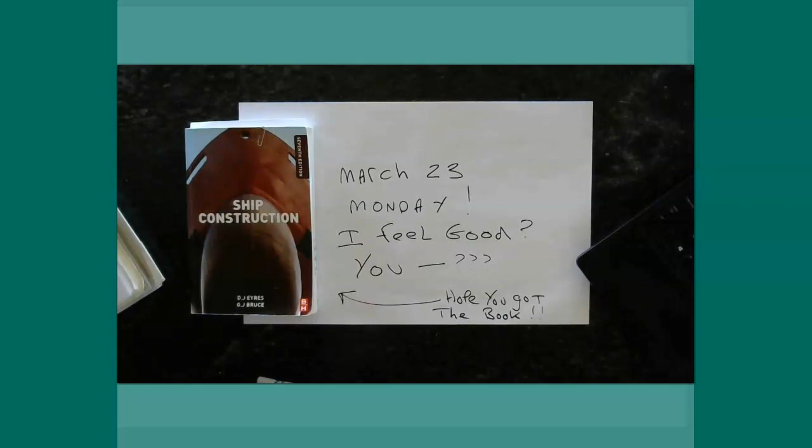Ship structure, Monday, March 23rd. Today we're talking about aft end structure. It's in the textbook. The first thing to understand when we start reading the chapter is that a lot of effort, time, and considerable attention is paid to the stern of the ship, and here's a key word: in order to improve the flow into and away from the propeller.

In the past we've talked about this indirectly. Remember that first day of class I put a dollar sign on the board? Everything in this business is about money. If we can improve the flow of water into and away from the propeller - how it feeds in and then feeds back out - we're really talking about efficiency. And if we can improve efficiency well, it's going to be really good for all of us.

There are two distinct types of sterns I want you to know about: one's called a cruiser stern, and one is called a transom stern. Transom sterns are like we've got on the State of Maine. Transom sterns are the modern choice for the following reasons: they have good hydrodynamic flow, they're less expensive to build, and there is greater deck area up above.

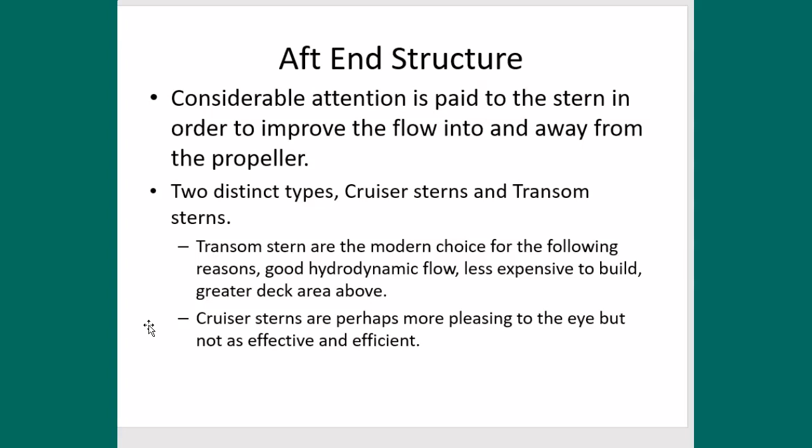So I'm going to be asking you on that next test about the two different types of sterns, and the answers are cruiser sterns and transom sterns. Here's a picture.

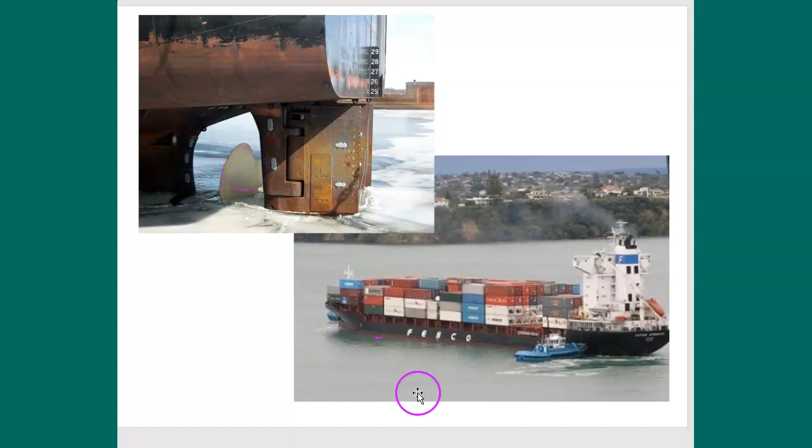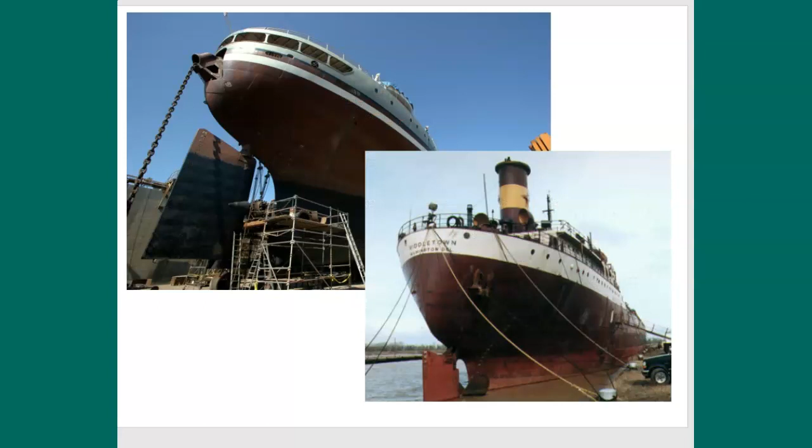This one, not so much. We can see that it's a little bit more submerged, but we do get a good look at this very different stern than what we looked at in the previous picture. So, cruiser stern and transom stern.

Remember, we're going to have double bottom drawings, bow fore-end structure drawings, and stern structure drawings. This is going to be pretty much the one. I'm going to be providing you with another sheet of paper, and we'll be working through that as a group, and you'll see how we do that.

Well, we're going to move off this diagram and come back to the camera sheet here. Let me just fill this in, and I'll give you the rough shape.

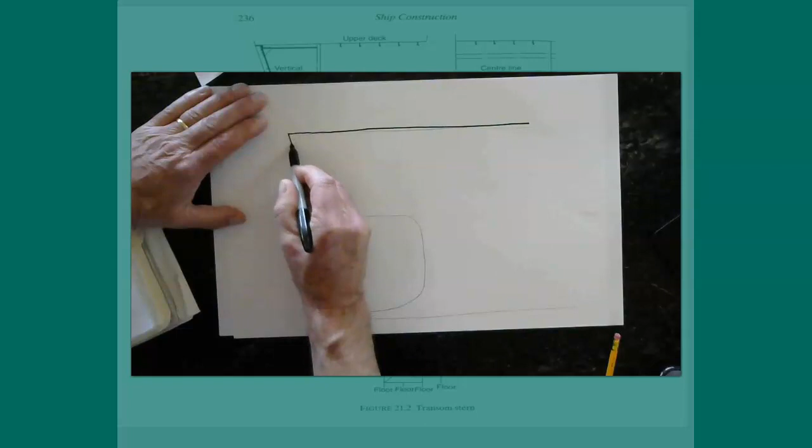This is going to be a transom stern diagram, and this direction, of course, is towards the bow. And let's label this transom stern. Okay, so we'll get her set up like that.

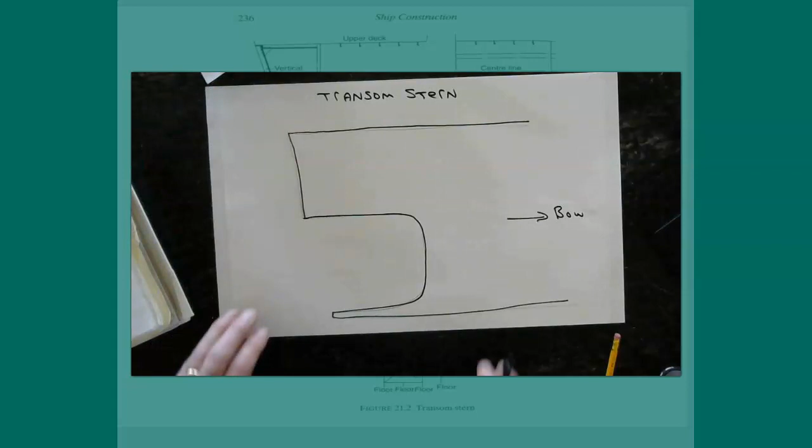As we go through this, let's make a list. I'll put this down here on my notes, in a little bit of color. I'm going to make my list over here of the type of stuff that we want to get into the drawing.

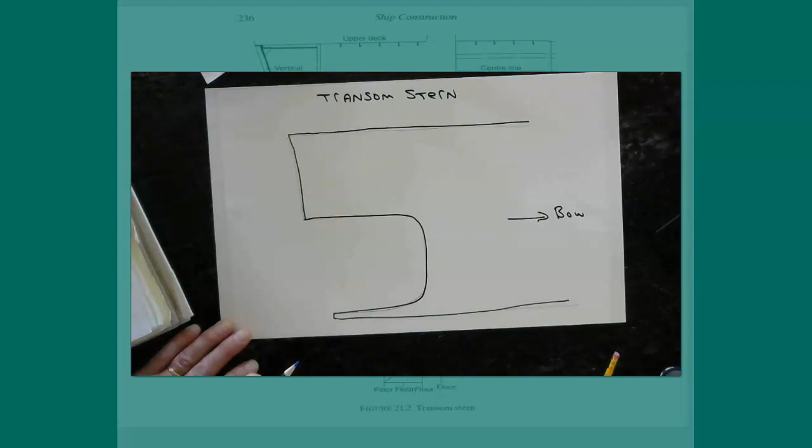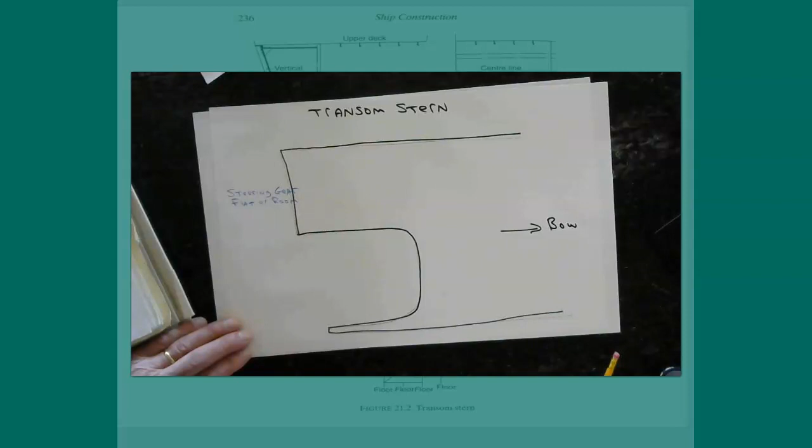So number one would be the steering gear flat. We could also call it the steering gear room, or the steering gear space—something like that. We want to have, I'll put a little bullet there, something called the rudder trunk. That's good, write that down. We're going to show the after peak tank.

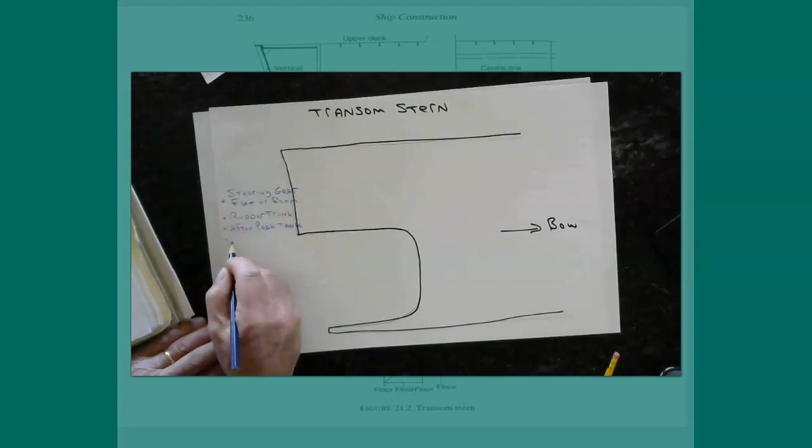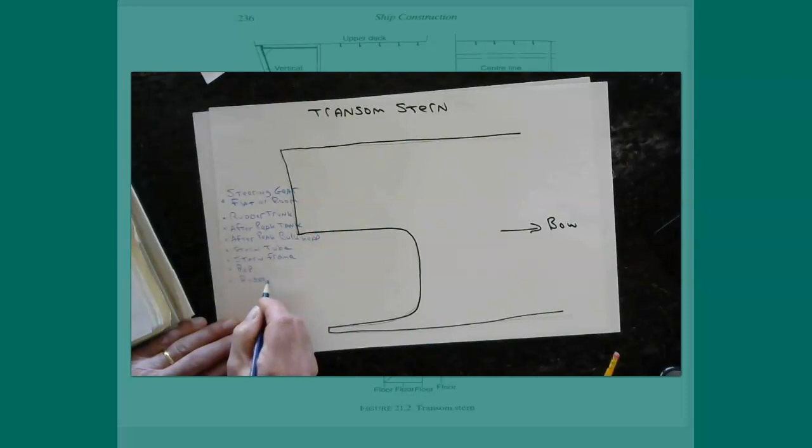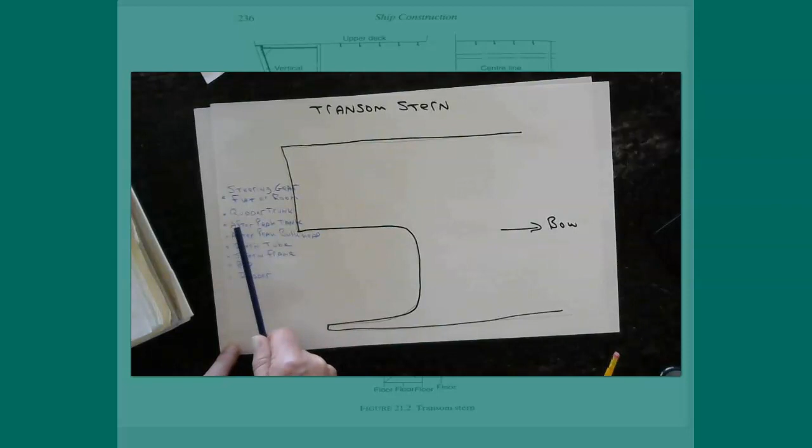It's also going to be the after peak bulkhead. Something called a stern tube. Stern frame. And of course, the propeller and the rudder will also be included back there. So: steering gear flat or steering gear room, the rudder trunk, the after peak tank, the after peak bulkhead, the stern tube, the stern frame, the propeller, and the rudder.

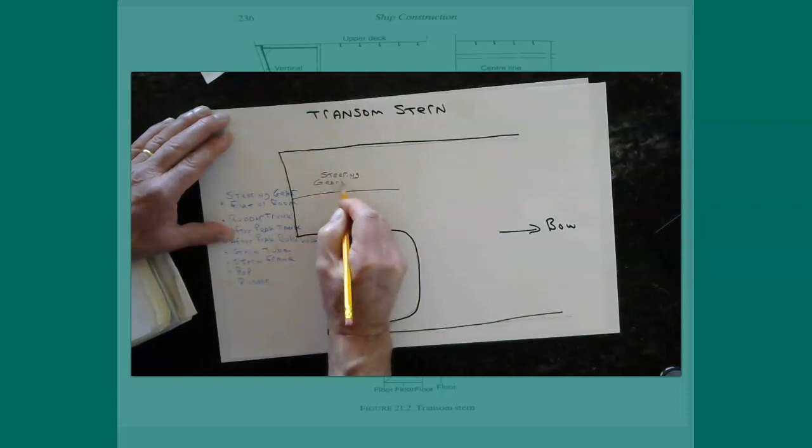So let's start. Let's divide this space something like this, and we're going to call this area here the steering gear flat, up in this location. You can imagine walking back there, and through that door, there might be a room here where all the steering gear material was—you're familiar with that from the training ship.

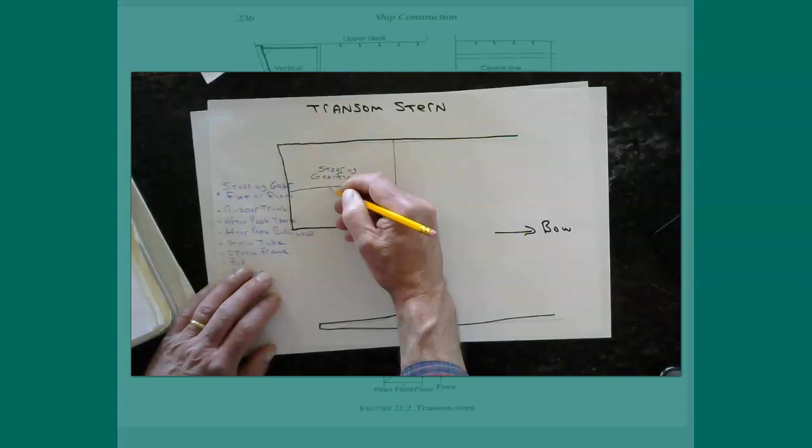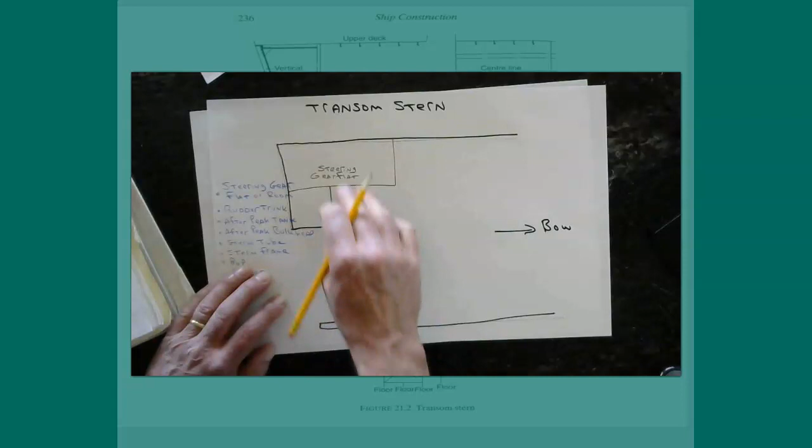Now, this space underneath, we need to show this somehow because there has to be something called a rudder trunk. The rudder trunk is a space that connects the outside down here into the machinery. Let's just show a little bit of machinery, some pistons and rams, all this stuff so that we can turn the rudder.

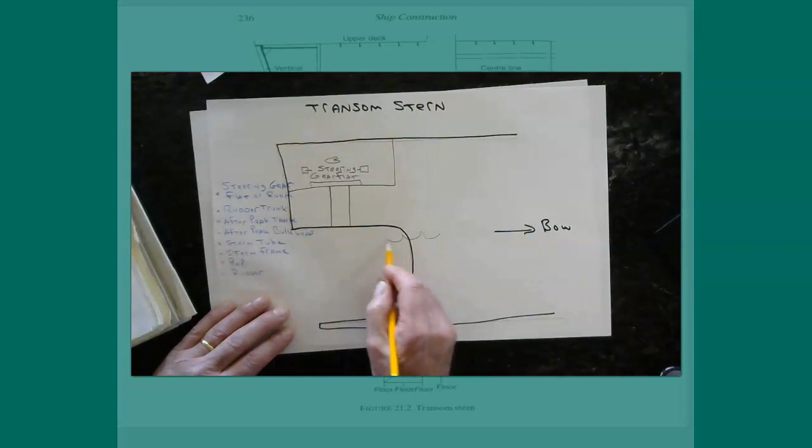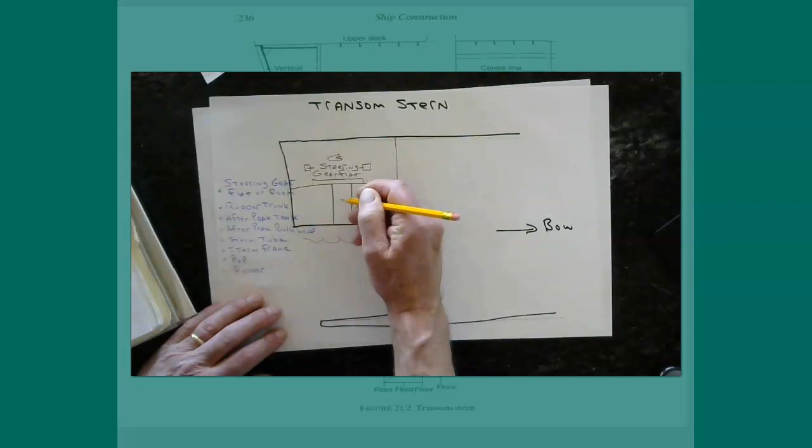But the rudder trunk is not a void space. It's a space that connects from—let's put water right here—connects to the water level. And that water level could be up here, it could be down here, as the waves come. Think of the escape trunk down in the engine room that comes all the way up to the main deck—the escape trunk. So you know what a trunk looks like.

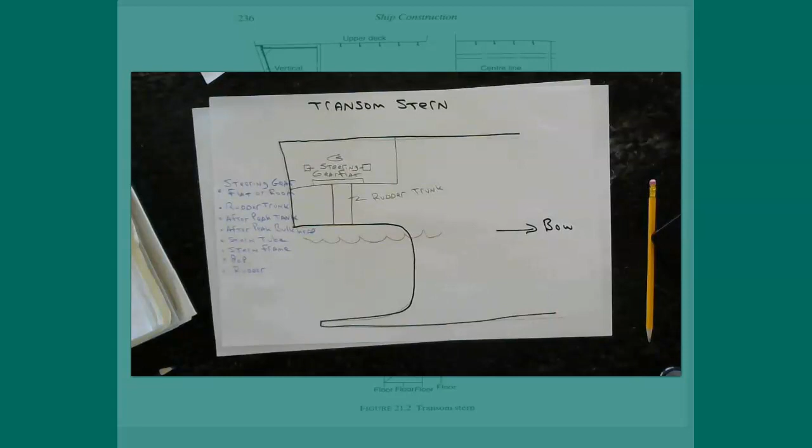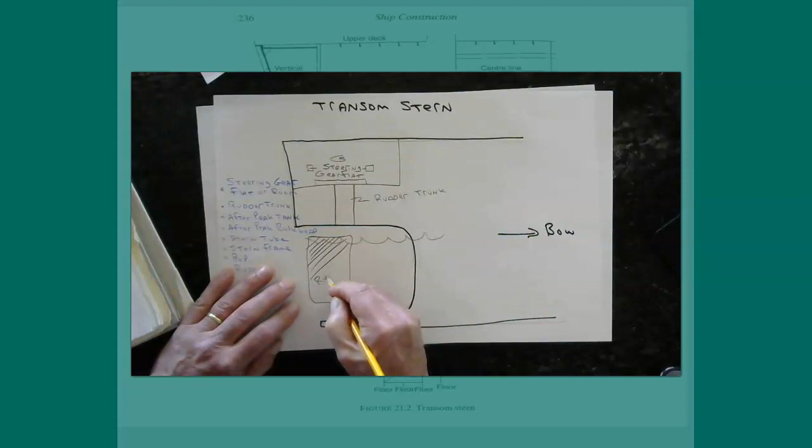It's usually a sort of vertical shaft, and you can imagine that the rudder is down here. I'm going to show the rudder, and I'll put the rudder in. We will do this drawing a number of times, I assure you. I'm just going to put this down as the rudder in this way, and the rudder post comes off the rudder, goes up through the rudder trunk, and into the steering gear flat.

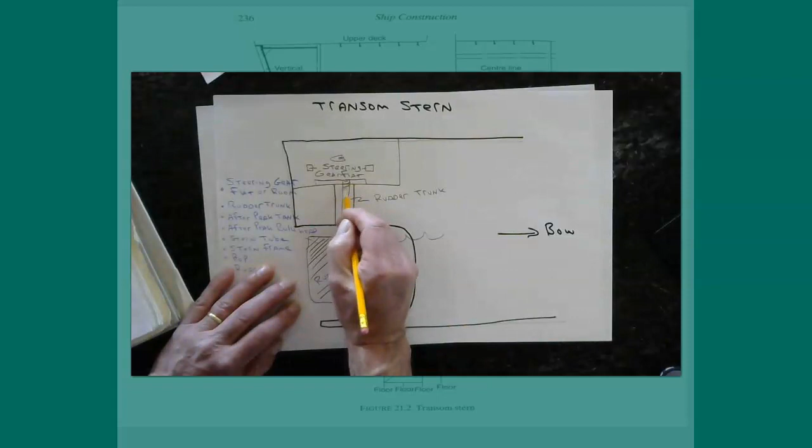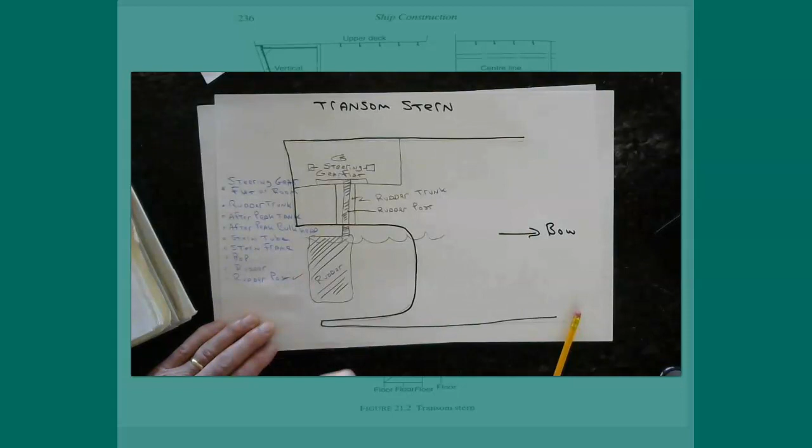So this is the rudder trunk, and this is the rudder post. Now, did I put the rudder post on this list? No, I didn't, so we have to add the rudder and the rudder post. Okay, let's see. We had a lot of stuff here, so we'll start checking this stuff off. I got the rudder post, I got the rudder trunk, I got the steering gear flat, so check, check, check.

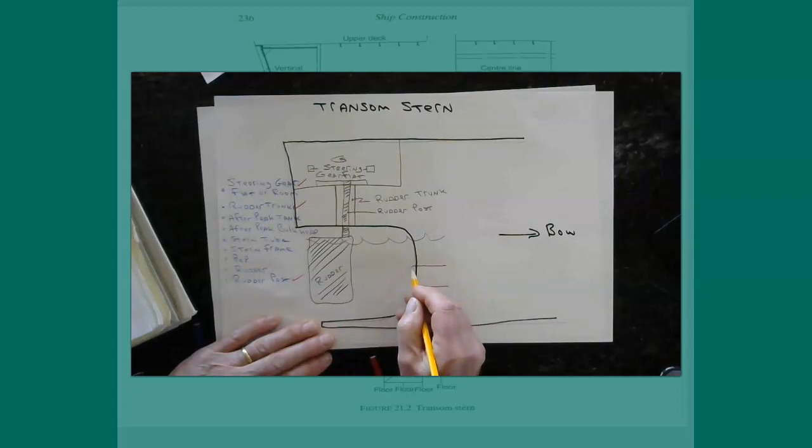Let's see, we got something called a stern tube. Now the stern tube goes right here, and we'll draw it sort of. Again, it's the area where the shaft comes through, so it is round like this. It extends from just outside the ship to here, and we'll label it stern. It would help if I spelled that correctly.

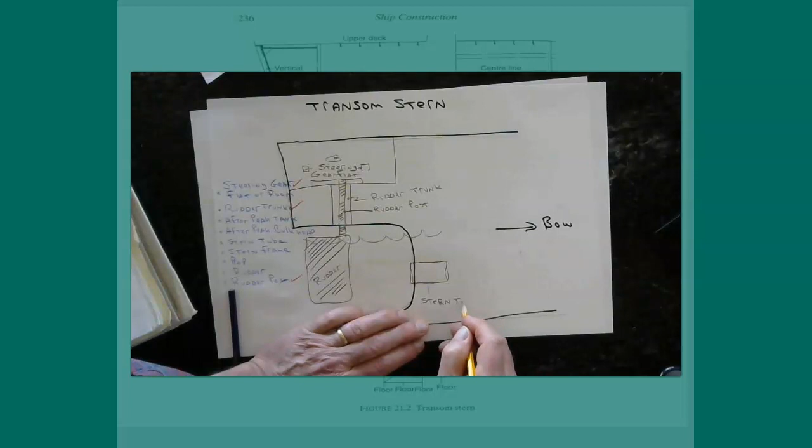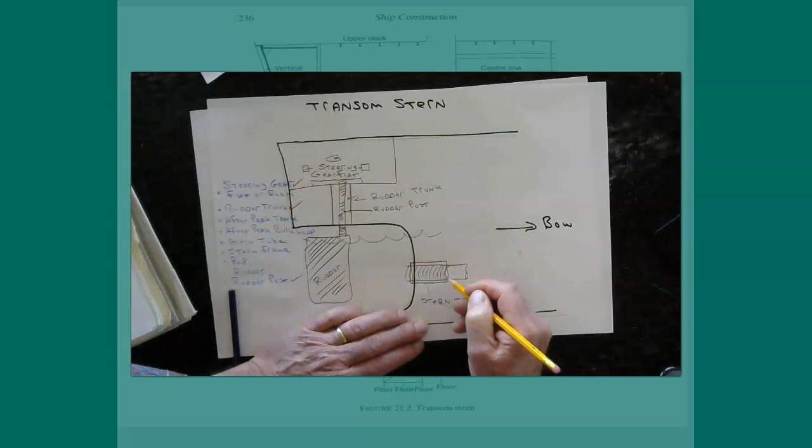And the shaft comes through the stern tube. Have you all learned how to draw something so that, see that little way I just put that on there? That, in mechanical drawing, is a way to show round. It kind of gives it a little bit of dimension. So here's the stern tube.

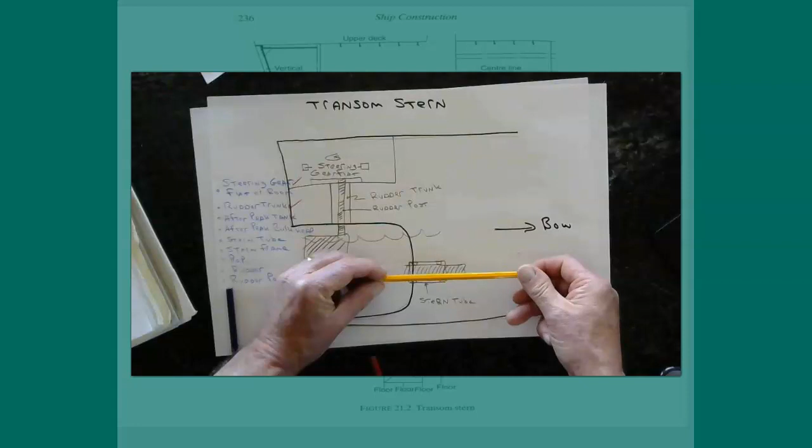And the stern tube supports the shaft. It has bearings in it. But the stern tube has to be such a way that it allows, see the shaft turning? And we can do that with this. We'll use this bigger pen. So the shaft has to be in here so that it can turn. The propeller shaft has to be able to turn.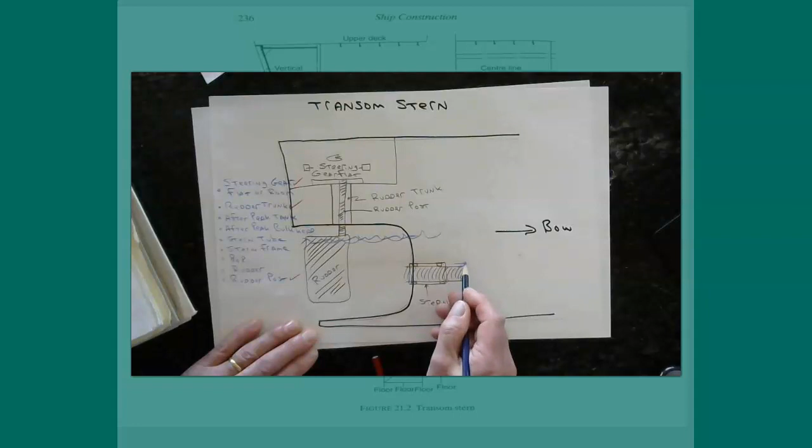The other thing it has to do is keep the water out. There is water here, and it wants to come into the engine room. So we need to stop that, so it needs to be a watertight seal, and we'll talk about different ways that that's done. It has to be able to keep the water from outside the ship from coming into the shaft alley, and it needs to allow the shaft to be able to rotate.

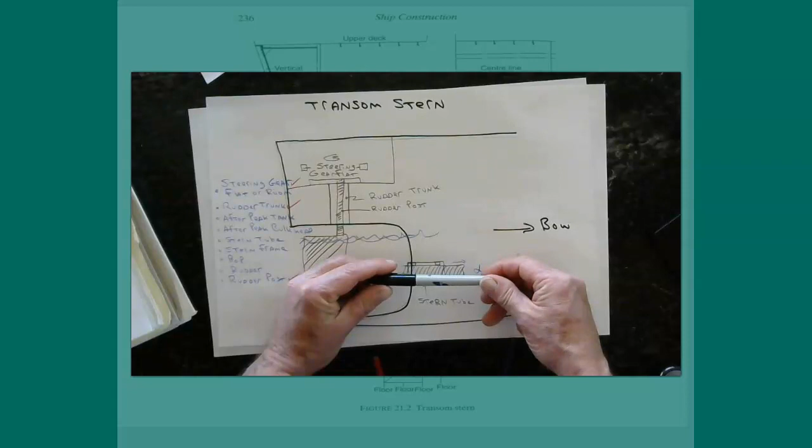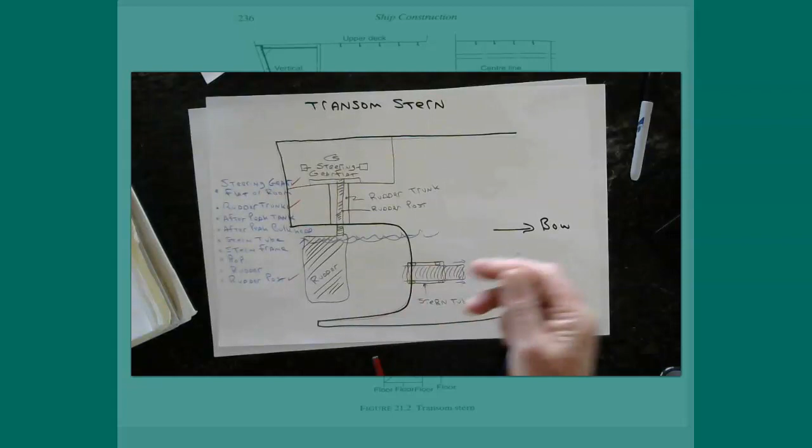That's a pretty complex and pretty important piece of equipment. You have stern tubes on big ships, and you have them on small boats. If we were there in the classroom, I'd show you a picture, I'd show you a little bronze stern tube that's sitting up on that shelf where I keep all the models in the classroom. I'd drag it over and you'd look at it and you'd see how it allows the shaft to turn.

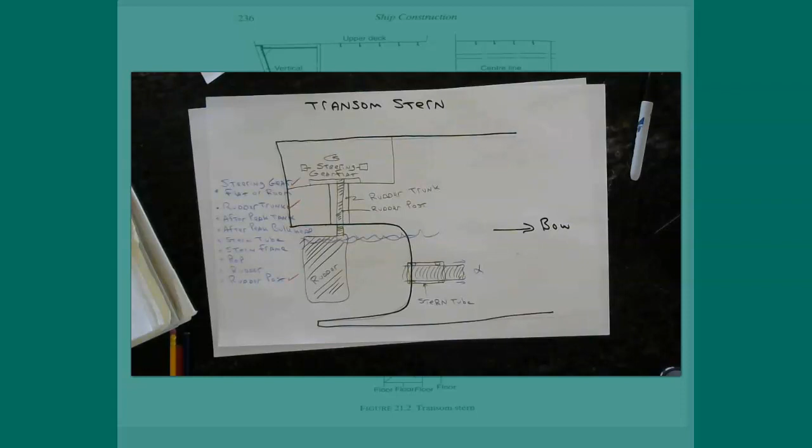And I think it came off one of our double-ended boats on the waterfront. A number of years ago, we built those and we changed out the stern tubes. Just a little example, maybe I can find some more pictures of it. And then, any vessel, whether we're talking about the state of Maine, or a little launch or a sailboat on the waterfront, every one that's got a shaft coming out of it and a propeller has to have some type of stern tube for the shaft to go through. So that's a long discussion.

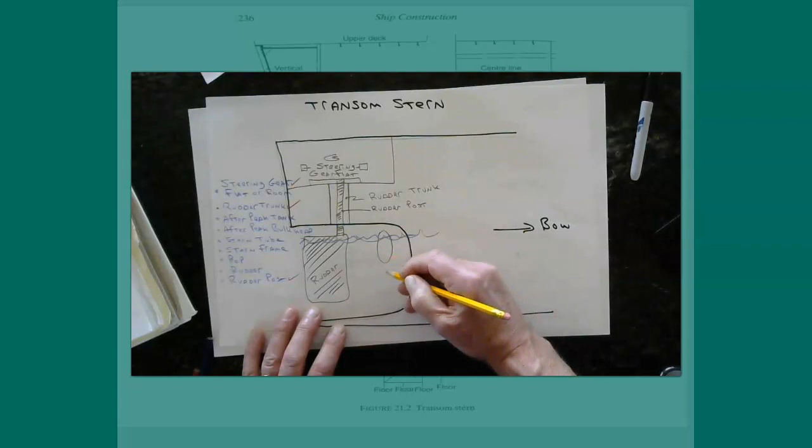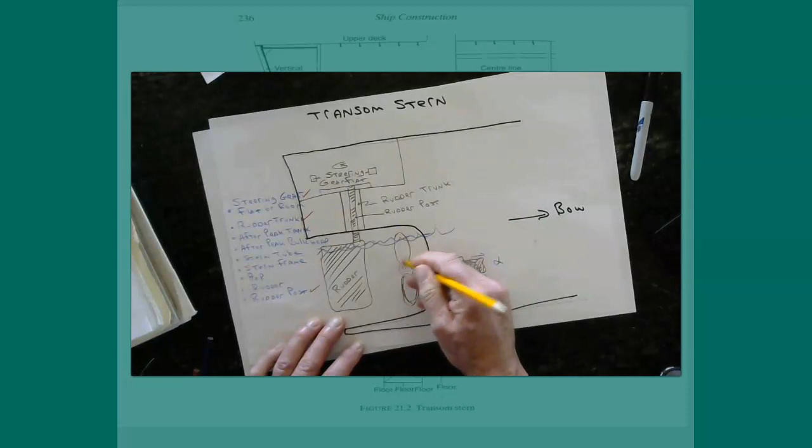Now, of course, we have to have this area here for the propeller, and I'll draw the propeller here with a couple of blades like this, and it connects to the shaft. Kind of get that a little bit more balanced. Now, I didn't do that very well. Let's clean this diagram up here a little bit.

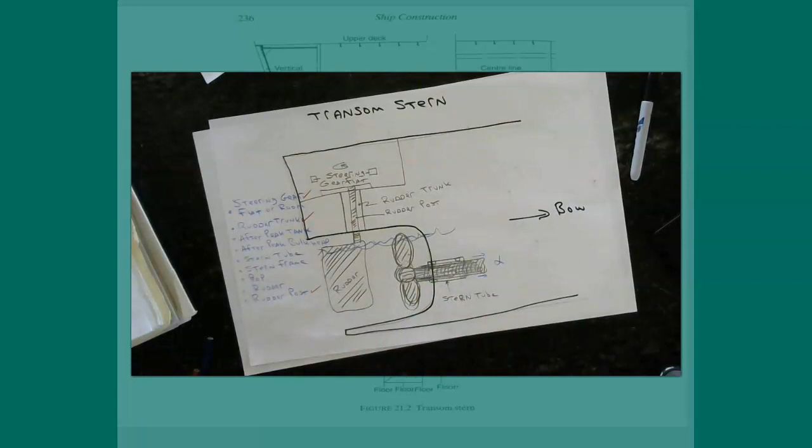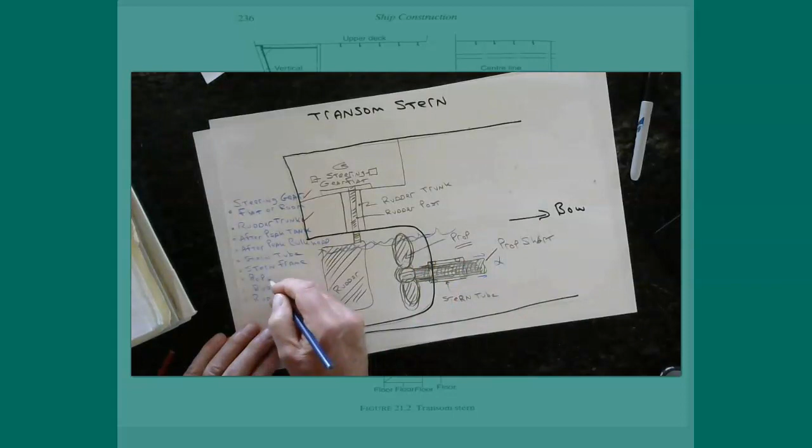What do we have now? We've got the stern tube, and we've got the propeller shaft. We've got the prop itself. We've got the rudder. Let's go to our list. We got the prop, we got the stern tube, we got the rudder, and let's see what else have we added here. We got the prop shaft.

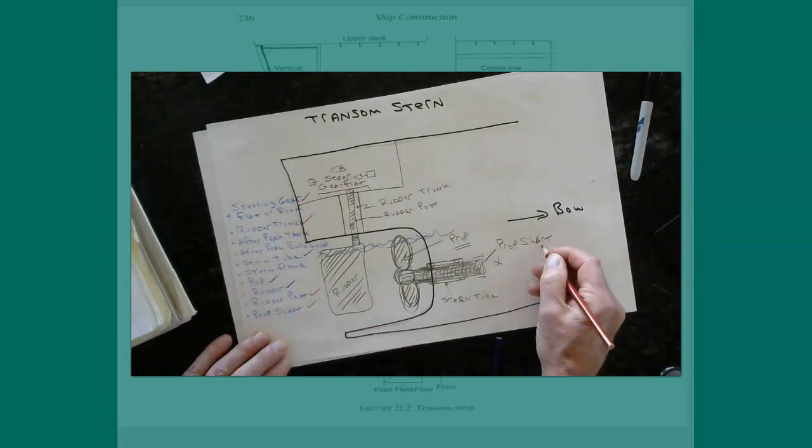I guess we can include that as well, so we'll give that a check mark. We got this, we got the rudder post. Yep, we got that. We got the rudder. Check, we got that. I'll use the right colors that I was using. Okay, so we've added a lot of stuff to this diagram. Let me get that set for you.

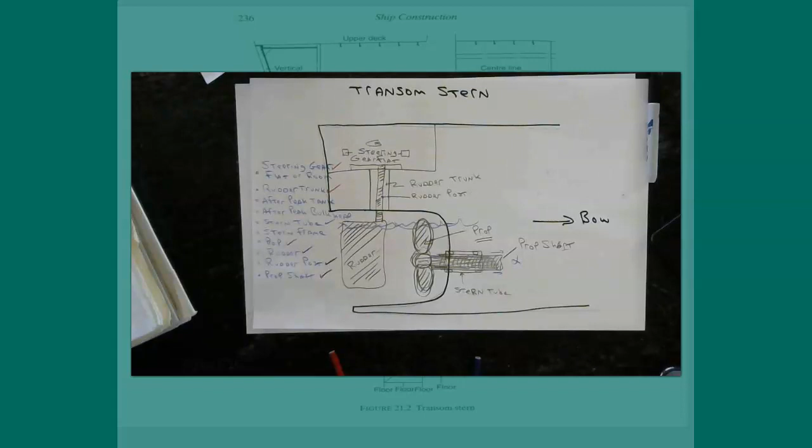We got this thing called a stern frame. I want to talk about that, a stern frame. And any ship of size is going to have a stern frame. So I'm going to grab, let's see, I think I'll use green to kind of demonstrate what the stern frame area will be. I'm going to color it in here.

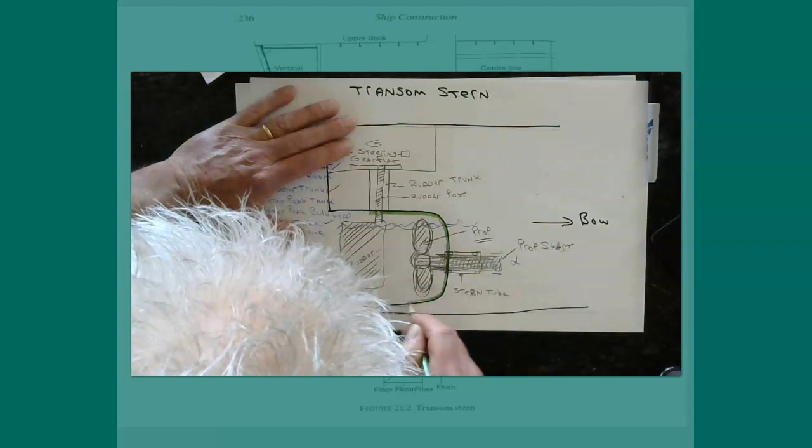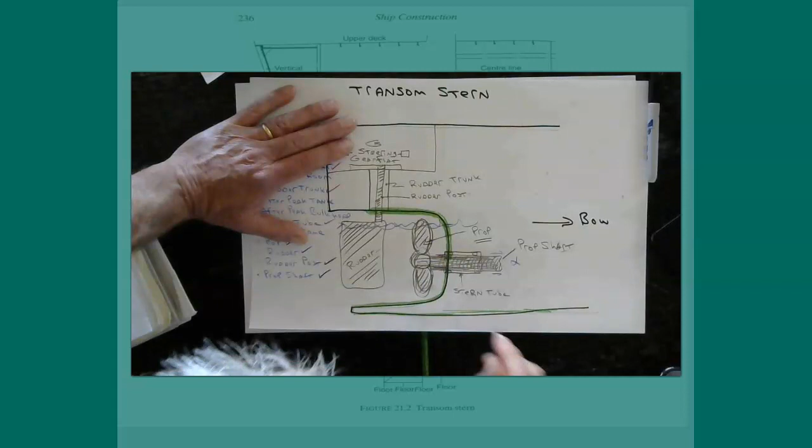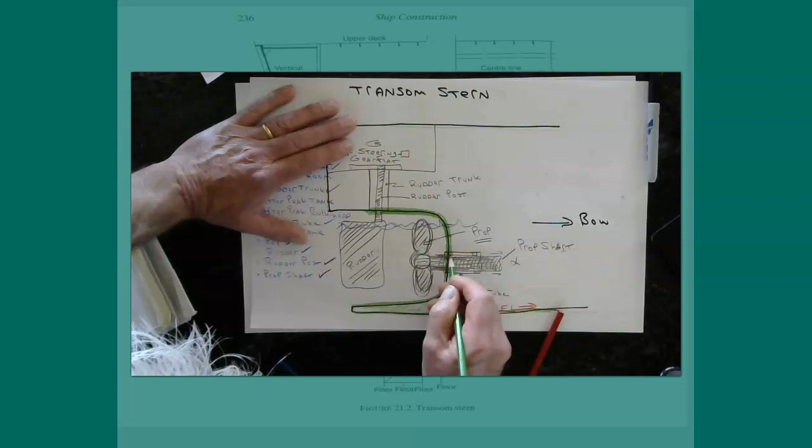Every ship would be a little bit different. The stern frame is kind of an extension of the keel. So here's the keel of the ship. Somewhere the keel starts to become a little bit more structural, a little bit bigger. So I'm giving it some pretty big size here. It'll make more sense as we go, but you can see this area of the ship, this area that extends out, all of that is called the stern frame.

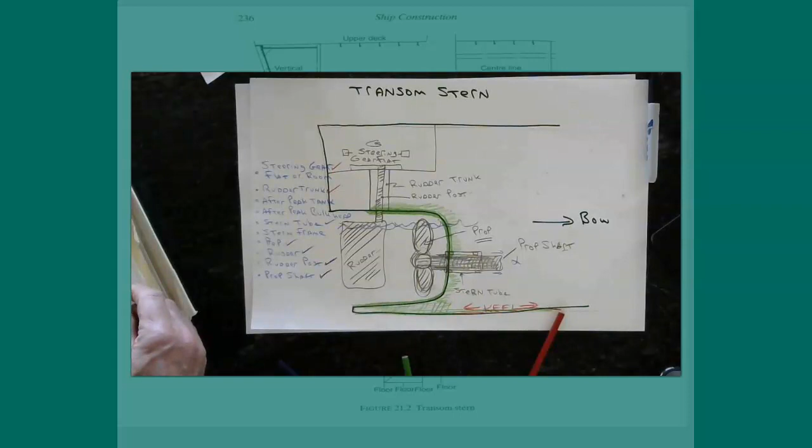I think I've got some pretty good pictures of stern frame coming up, so we'll go ahead and start looking at those. After peak tank, stern frame. So we've got that. I'm going to check it with green.

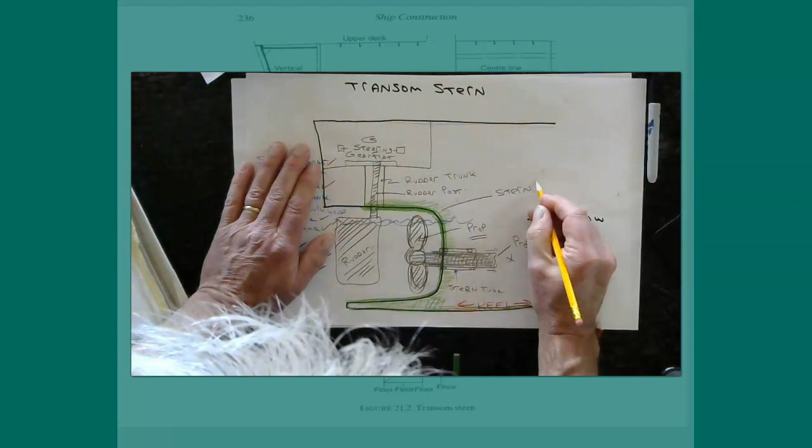It is green, well, no, it's green on my drawing. Let's see what else we got. Well, first of all, you can see there's a whole bunch of stuff, maybe some new words for you, and so on and so forth.

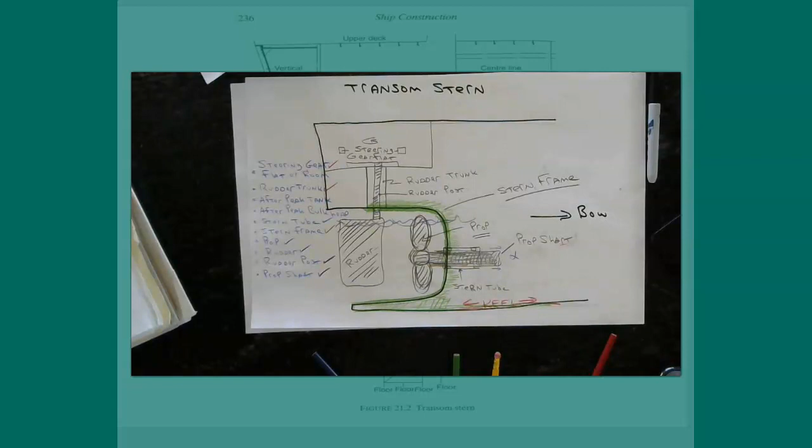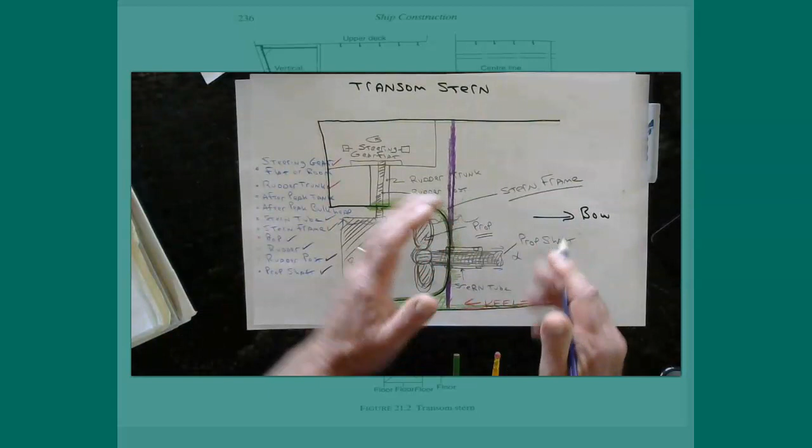What have I, oh, I didn't put in the after peak bulkhead. Remember, that's kind of like the collision bulkhead. You get a collision bulkhead on the bow and the after peak bulkhead back on the stern. So let's do that. It's very likely that the after peak bulkhead would be right there. I'm going to put it pretty significant. Remember on the training ship, this is shaft alley, right? We've all talked about you guys walking down, going into the shaft alley. So the after peak bulkhead is there.

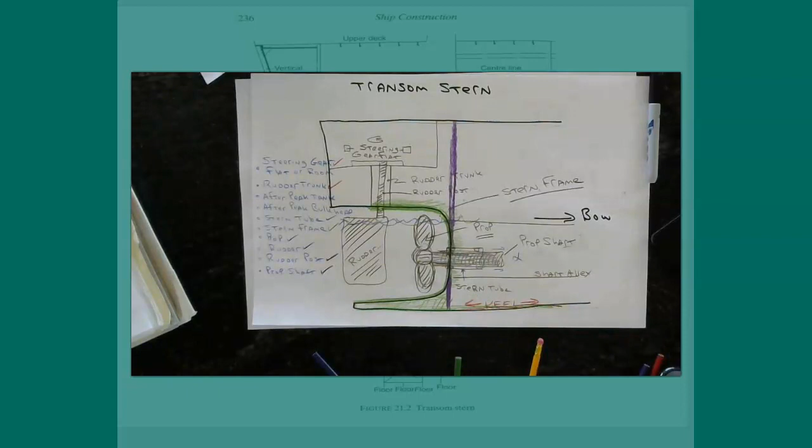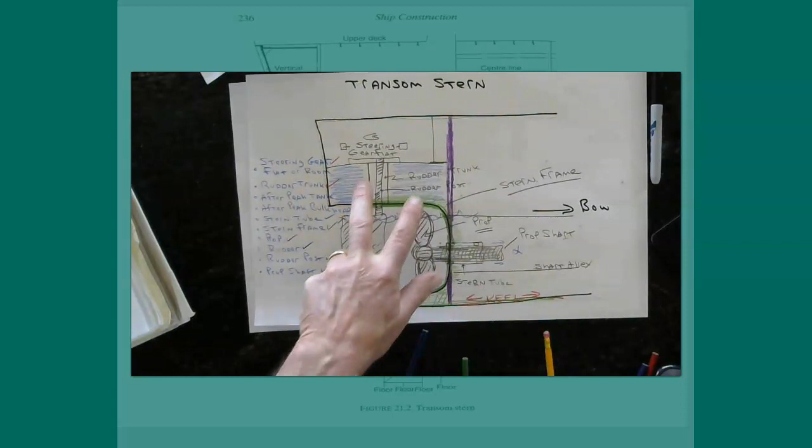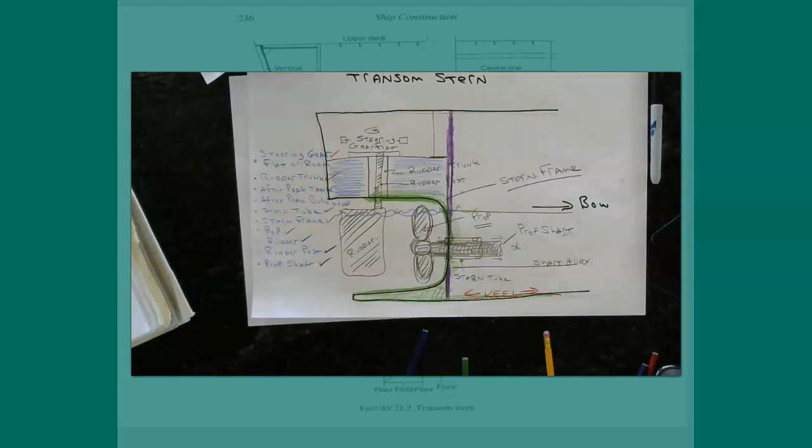Okay, so I did a little bit of sketching and catching up with where I was on the board work. This would be the after peak tank here on this particular drawing. It would be aft of the after peak bulkhead, the after peak tank. It's a ballast tank. Notice that I've kind of shown it surrounding the rudder trunk. So if you were in that tank, you would see this thing called the rudder trunk coming up on the centerline. Actually, that's where the rudder's going to be.

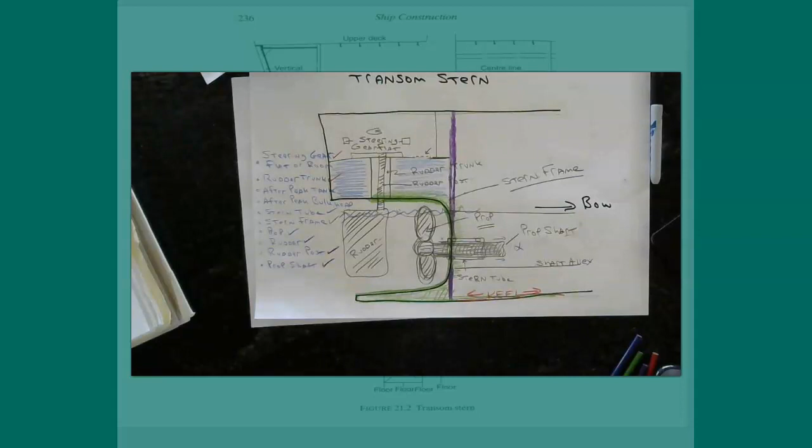And you'd be able to, if the tank was empty and you were down there, if you had gone down into the after peak tank and accessed it through this manhole cover here, took the nuts and bolts and lifted the cover off and went down through it, you'd be able to walk around that whole space. You'd see lots of structural framing members, but you would be in the after peak tank. If you looked this way, the forward bulkhead of that tank would be the after peak bulkhead.

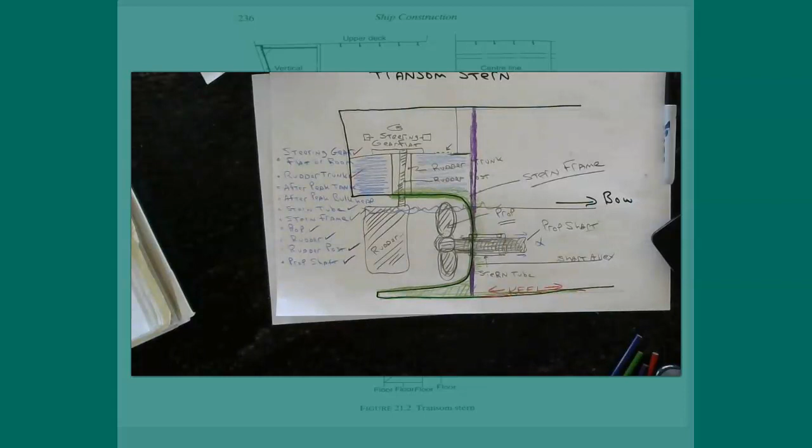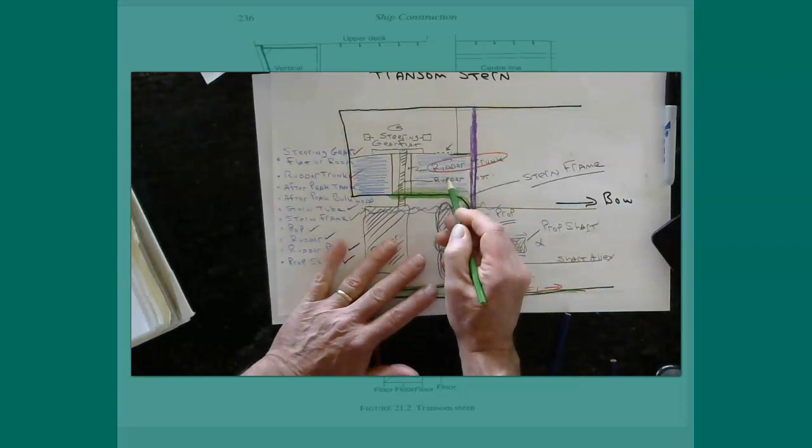And you would see coming up, kind of like the trunk of a tree, it's hollow, and that's the rudder trunk, right? Let me just highlight that. And inside the rudder trunk is the rudder post, and the rudder post connects the rudder all the way up to the machinery in the steering gear flat.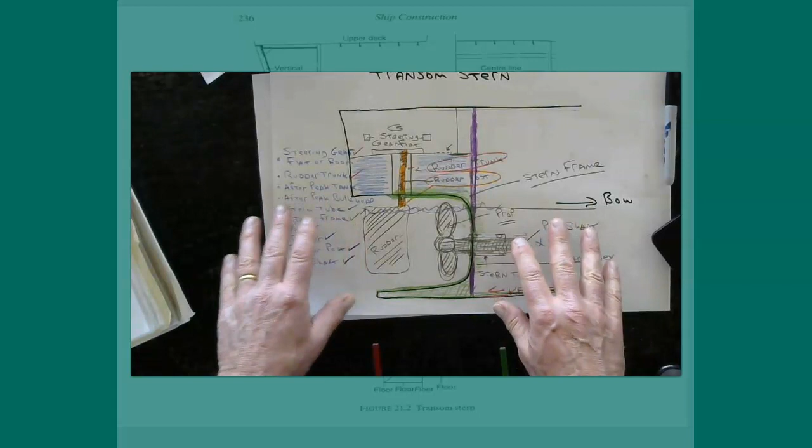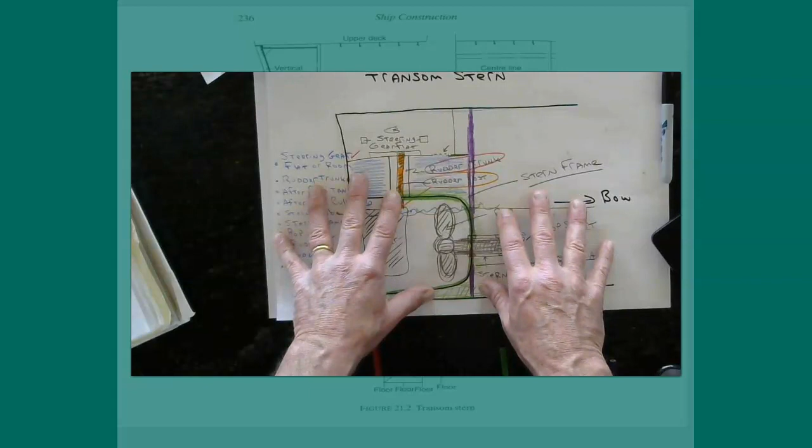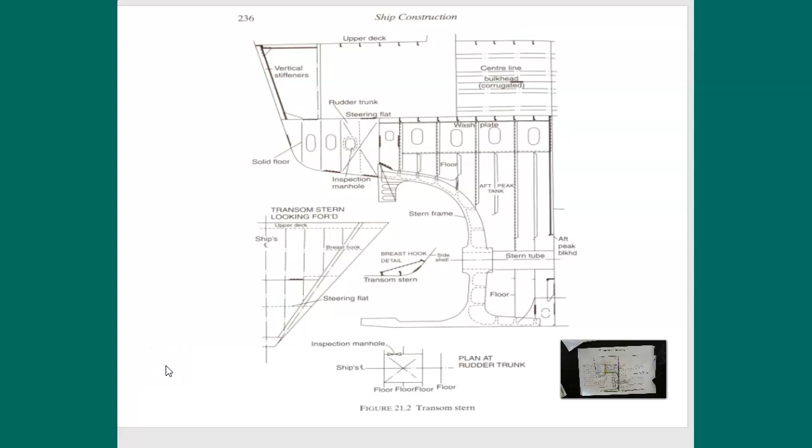So what we got now, let me get all my pencils out of the way, and let's go back to this drawing. Oops, that's not what we want. Where is that PowerPoint? Right there. So we'll go back to this drawing now. And so here's what you just drew in here.

Here's the steering gear room, and here's the rudder trunk. It's just this space from here over to here, nothing very large. There is an inspection manhole that you would have to enter into the tank. You'd have to come into the steering gear room or wherever you were able to, the crown of the after peak tank. You'd have to go back in there, and the tank would have to be empty. Then you could undo this inspection manhole, and you could get a look at the inside of the rudder trunk.

You see this one, here's the stern tube coming down. This is the after peak bulkhead. On this diagram it's moved up, unlike the one I just drew, but we can draw it in different places. Here's the stern tube, this is where the shaft would be coming through. And here, this shape, I'm kind of tracing it out, it's an extension of the keel. What's it called? It's called the stern frame. It comes up, it's got a place for the stern tube to tie into it, for the shaft to come through it, and all the way up and hooks around.

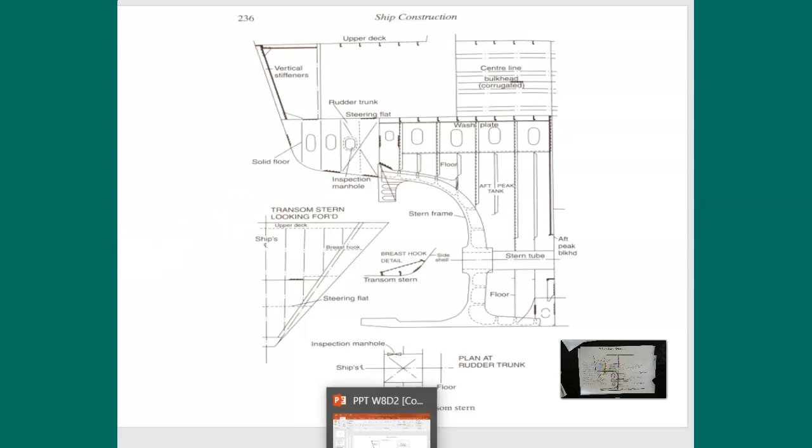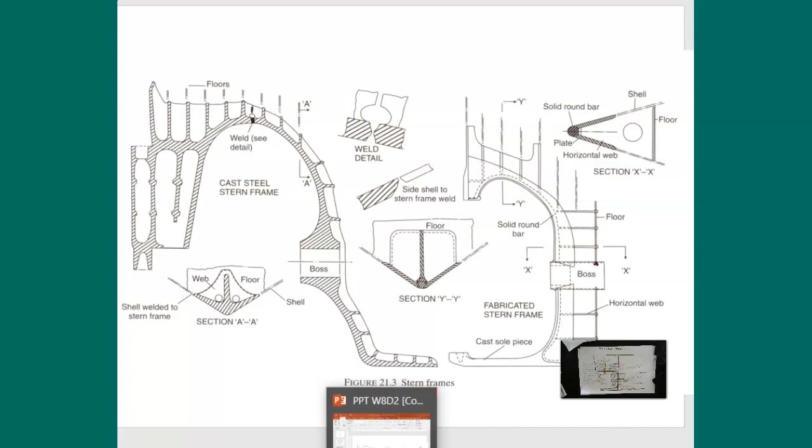Now here's some diagrams of a couple of stern frames. Let me clean that up a little bit so we can see it better.

See that shape? It almost looks like a seahorse or something, doesn't it? It does certainly, but where this is just a detail, for right now you can ignore that. This area that I'm circling with my mouse right now, that is the propeller aperture. Notice what it says right here where my mouse is - it says a cast steel frame.

So there's two ways to make a stern frame. One is to make them out of liquid, molten, liquefied steel, pour it into a mold to get this complex shape. That's what these diagonal lines mean. Whenever you see a drawing that has these diagonal lines, that means it's cast steel.

There's a few places on a ship that are cast steel. On the last test from that last chapter, the upper and lower end of the hawse pipes, you might remember this question - that was in the reading. I know we didn't discuss it, but it was in the reading. The upper and lower end, the hawse pipe lips on the exterior and on the upside on deck, the hawse pipe lips are cast steel.

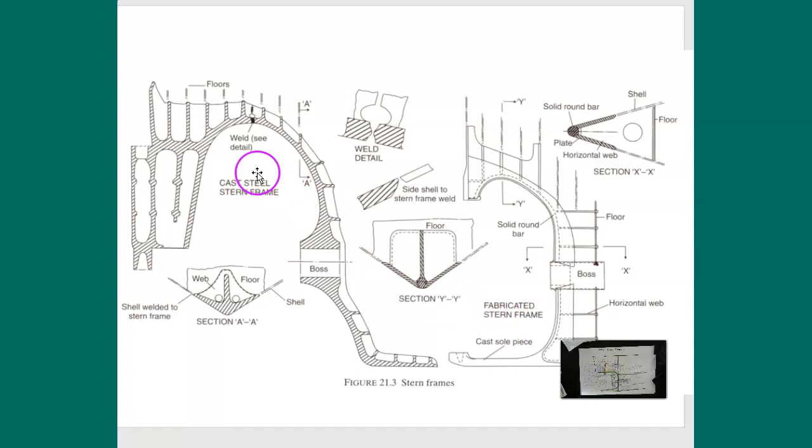Here's a good diagram - stern frames cast and fabricated. Here's one, here is a cast stern frame which has all the details on it, and here's one which is fabricated. There you go, hey, look at this right here.

So study all of this and know the parts. I think that would make a good quiz at some point that we could probably do online.